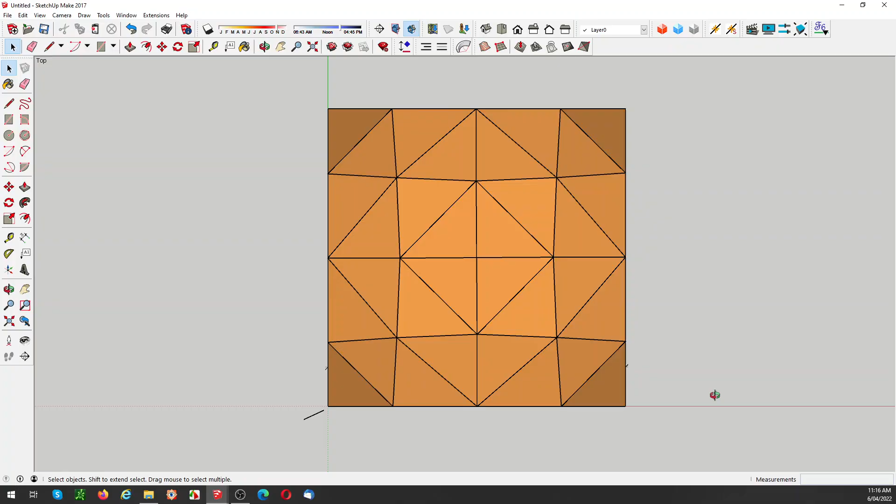Now that's going to be a point later on, because there's a method that you can use which doesn't really use the curves of a geodesic dome to create the geodesic dome, and it is simply using a grid to create the intersections and the points where they would touch a sphere. Now, it's not particularly hard to do, but we'll go through that at some stage in the future. But this is basically the look that I want to achieve, this outcome.

You note the base is approximately 8 meters square, so the span of this is not insignificant. I may or may not stick with the 8 meter span. Between 6 and 8 meters is what I'm looking at. The strut lengths start to get quite long. This one here is one of the longer ones. It's 2.6 meters long. This one here is 2.5. This one's 2.3, etc. So you can see the lengths are still quite reasonable.

If I needed to stiffen them up, I can either go to a thicker section size or put in intermediate dwangs, as Paul Robinson says. You're making a quasi higher frequency dome. But how did I achieve this? How did I achieve my goals if I didn't use maths? Well, I cheated. And it's a damn good cheat, but it is a cheat nonetheless.

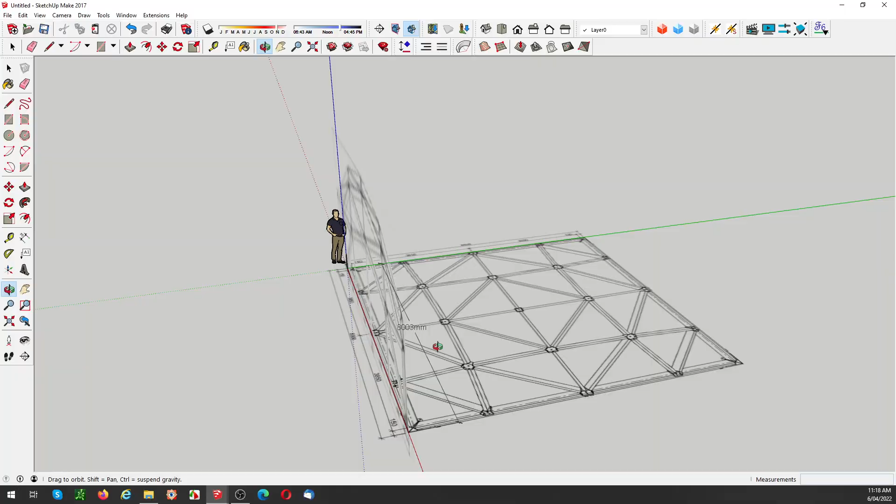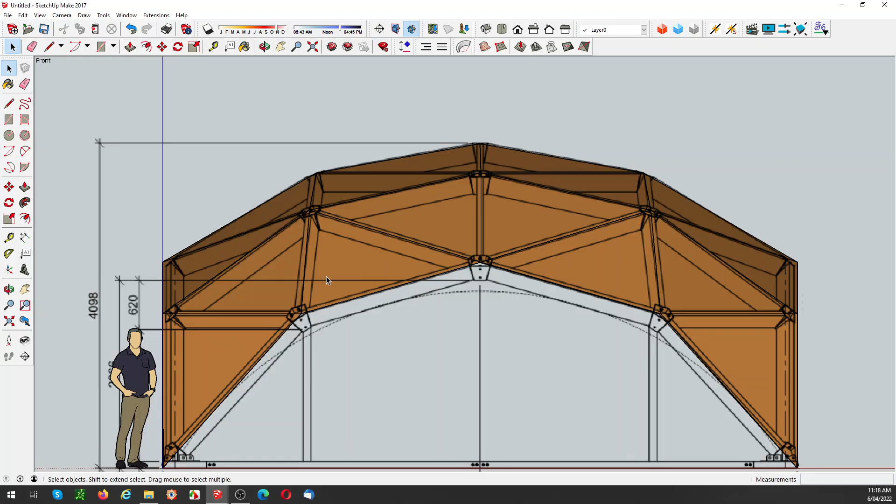Scouring the internet as we all do, I came across some plan and side elevations of the dome. I'll hide that and hide that. So here I've got virtually all the information I need to create my dome. And as one can see, again, going into parallel projection and going from the front, you can see that by lining up the points as close as you possibly can with the drawing, and if you project lines and guides sufficiently accurately, you can create your dome.

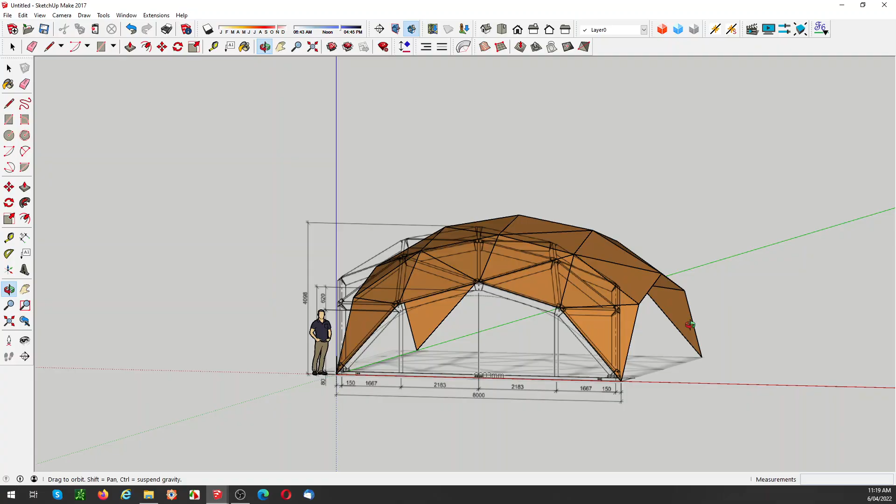So I'll just click out of that, and if you draw a line from here and draw it upwards, you'll get the point of intersection. Now there's a little bit of finessing required to achieve this, but in short order you can quite efficiently create these drawings, and from that you can go backwards to how you generate the drawings using geometry or maths to understand a better approach, because if you have to do this for each variant that you have, it's not a good way.

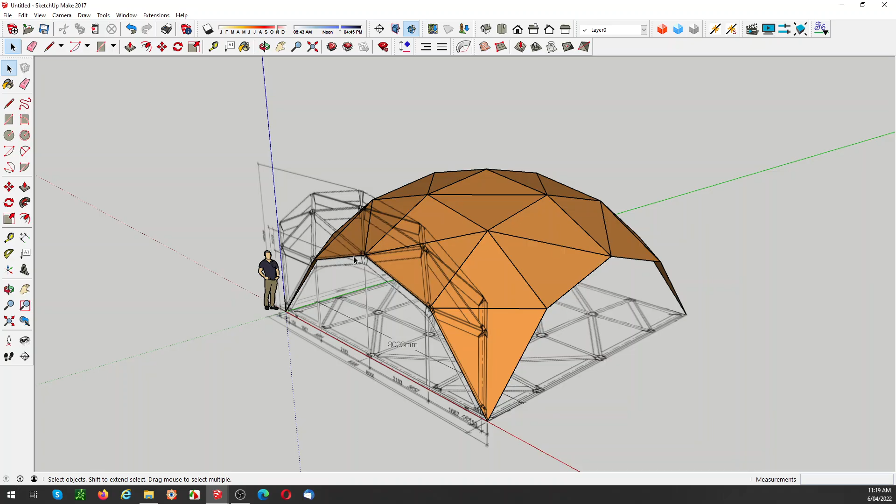It's bespoke for each version, and I don't recommend that at all. It's a good starting point, it's a good intermediary step to learning how to do it properly and how you get there. Now there may be other methods that are more precise than what I'm about to use in the coming videos, but as you can see, this is one method.

The other one, as I did say, was just to have straight grids, and what you wind up with is basically a truss, but it's a truss that's not really angled in its maximum direction. It's not a truss, but it's the idea of having everything in line. Now that can work wonders for you visually, but when you go to build it, you might find that what looks good on paper isn't in real life. So yeah, that's just the caveat there.

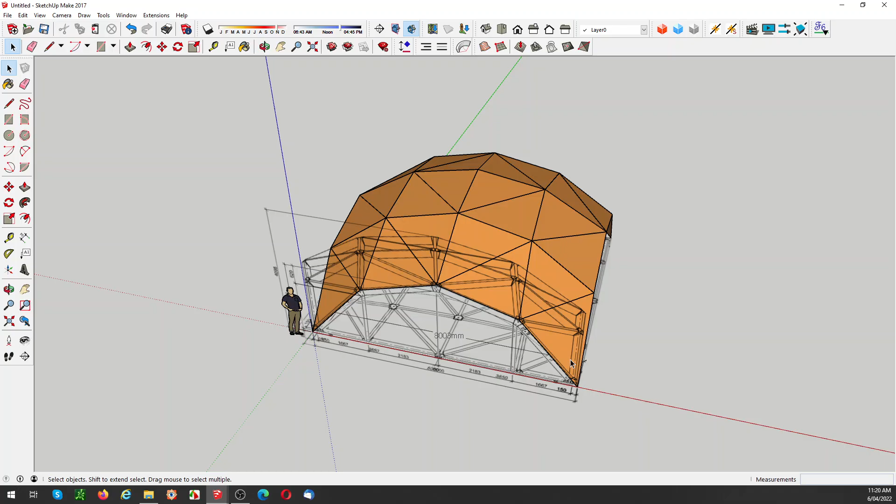So that was a quickie. This is what we're aiming for, so I'll just get rid of these. Alright. So when we're looking at the side, we've got a nice flat or flush point upon which we can put in a doorway, put in a side, etc. And if the loading on the struts gets too problematic, it's much easier to work in a flat plane. Say you wanted to put a line across there and there, you can actually use that triangle to help support the roof, which is what I'm calling the roof. Now that in itself is not a bad idea.

It also gives some more rigidity to the dome and more hold down capacity, because if you use screw anchors, which is what I'll be looking at using, if you use more of them, you get more capacity for the dome to be held down and stop acting like a parachute in reverse, where the wind comes along and gets underneath it and tries to lift it, or as may happen, the wind comes across and creates a negative pressure on part of the dome and it will try to collapse it.

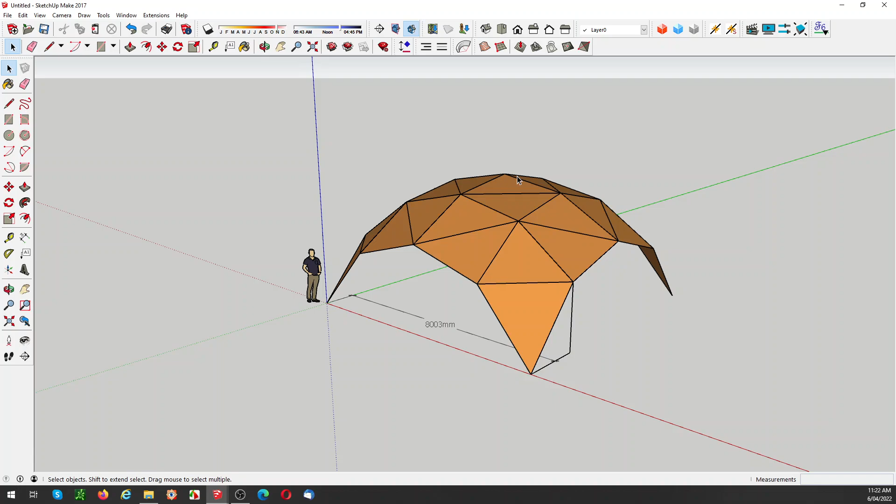Now, is that an issue in reality? Maybe not. Just that my nervousness as a professional builder says, where's the bracing coming from? You say, well, it's triangulated bracing, but this here is a huge hinge point, and you could have the top part acting as one piece, and all the pressure goes through these 4 lines of the structure and creates a hinge point. Having a point anchored to the ground helps mitigate that problem, or that potential.

Okay, that was just a quickie, as this is where we're going. We may come back to this and do an exercise of drawing it, but at this stage, this shape obtained through a cheat is the general area that we want to aim for via geometry or maths. Okay, that's it.